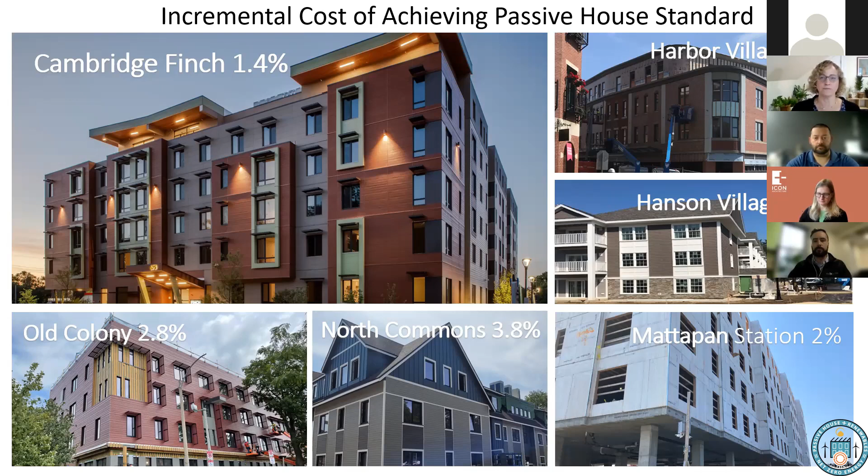Also, as part of our Passive House Design Challenge, part of the reason people might want to do Passive House is because it's not that much more expensive, but the flip side has to be true too. Are we really getting the lower energy use that everyone's promising with the Passive House standard? And so we've been taking a look at projects that have been built for a couple years now and trying to compare them to code-built and sometimes LEED projects as well.

Some of the logical places to look for that is in communities where there's energy disclosure ordinances. So Boston's one of those great examples. If you take a look at what was disclosed in 2019, sort for multifamily buildings, look for ones that were built after 2010, and cross-reference against which ones are passive house certified and which ones are LEED, you get this chart.

So the green on the left side is the only multifamily building that has been built for a while in Boston, the Distillery, which the picture is on the right. The energy use per square foot is very low there, 20.4. So it is giving the much lower energy use that we would expect from modeling. And when you compare that to the LEED and code buildings built in the same time frame with similar scale of projects, compared to the regular code ones, it's 62% less energy use per square foot, which is pretty dramatic.

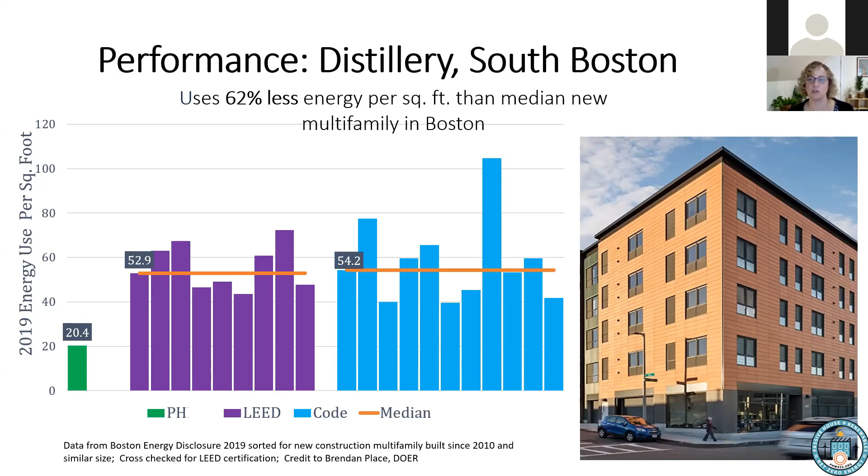And then we're finding pretty consistent information in Philadelphia also, which has that energy disclosure ordinance. So on the left are 3 passive house multifamily projects. All of these are just the affordable ones. And you see this, it's very interesting, right?

Because the green passive house ones, there's not much up and down. And that's not surprising, right? We have a lot of verification and blower door after blower door during the process of passive house. So I think it's much more likely that you're going to see what's designed actually built. And look at the variance in the code buildings, lots of variance. Some of these, I actually do know 1 or 2 of these were aiming for net zero, but no certification.

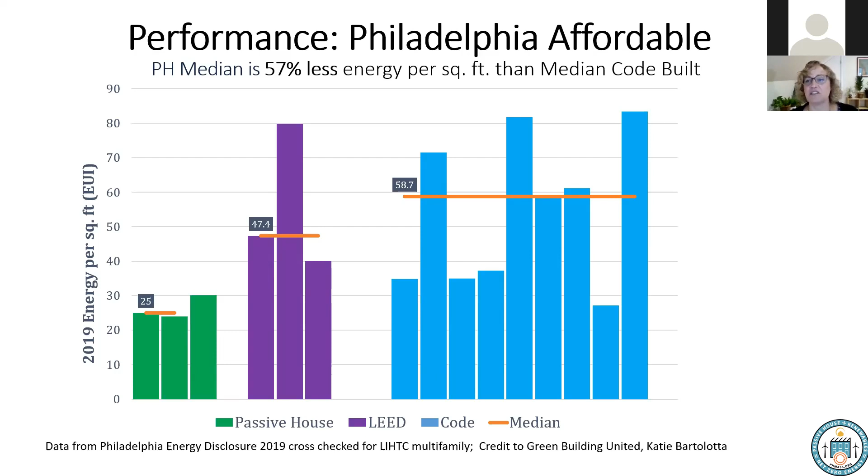And so that's what, you know, you can see some of these energy use per square foot are in the same range as a passive house, but it doesn't guarantee anything, which is really interesting. Then here's another example. This is basically Gilford Village. There were 2 stages of this. It's basically the same building built twice, 4 years apart, one with the LEED standard and one with passive house standard. And again, we're seeing around 61% less energy use in those buildings.

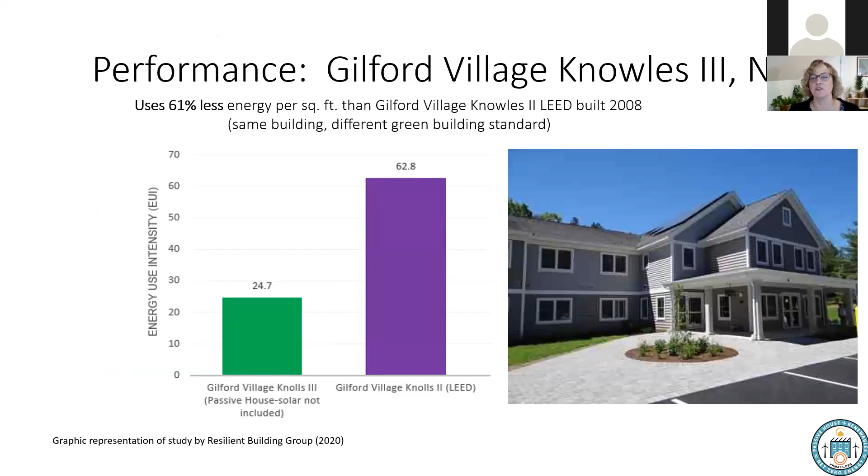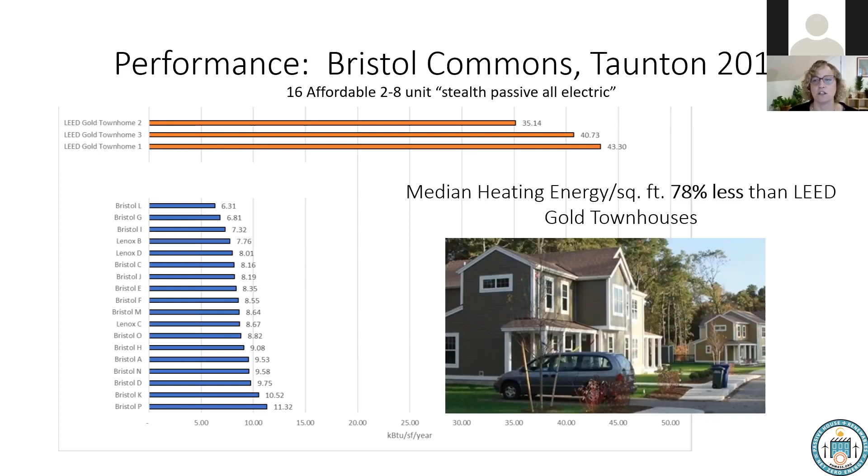And I think a lot of people know this one. This was sort of a stealth passive project. There were 16 townhouses between 2 and 8 units in Taunton. And this is just on the heating energy, so it's not exactly equivalent to the energy use per square foot. But again, we're seeing very, very dramatic decreases in energy use for very modest incremental costs. So that's really encouraging. So I'm going to hand it off to Michelle, who's going to talk a little bit more about the Gloucester project.

Awesome. Thanks, Beverly. So it's critical to design it right, which takes intention and a team. And then it's also critical to build it right, which takes communication and craft. And in the end, what I'm seeing real time when we have projects that have committed to doing commissioning and tracking, monitoring, and Tom's going to get into some of this, we've got to confirm that what we intended is actually functioning as intended. Next.

There we go. So I'm going to talk about Harbor Village today. The Distillery was our first passive house multifamily project, and it was in the city of Boston. This is our third. Harbor Village just was completed a couple of months ago, and whoo, passed the blower door test. And let me tell you, it was with a lot of pins and needles on the way. So I definitely have some lessons learned here. Also want to do a shout out here. Look at that fabulous lobster. This is our client in the North Shore who loves to put art on buildings, and it's just so iconic and fabulous. Next.

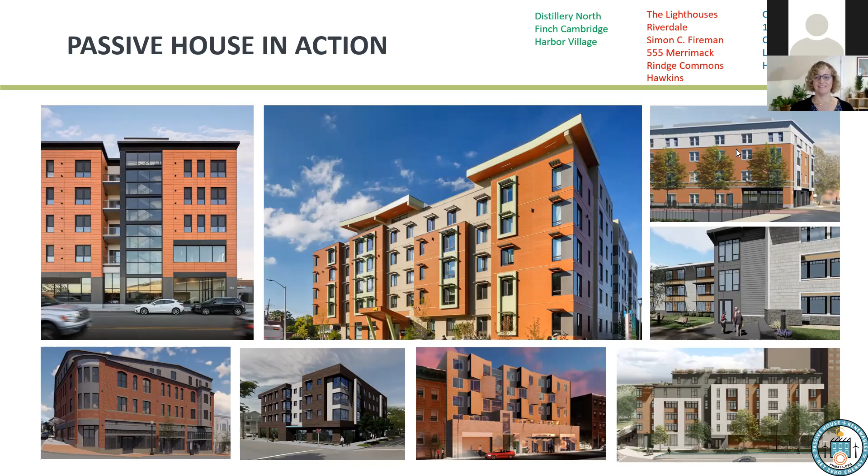Next. And there are a lot of really good reasons for that, which aren't just because passive house makes so much sense. They're actually because there's been a lot of great groundwork done. And so Beverly talked about Mass CEC, but those design incentives were critical to jumpstarting the broader market, and that's really what Mass CEC is focused on. Before that even happened, passive house was actually acknowledged in the building code as an alternative compliance path. I don't think that made much of a difference for the most part. But then those incentives came, and a handful of projects pursued them, and that ultimately opened the window and the door for the utilities to weave that concept into their incentives.

And we are, again, very lucky in Massachusetts to have the Mass Save incentives, which ultimately focused not just on affordable housing, but any multifamily housing at scale. And so we're starting to see some of the market pay attention. And I will say that a lot of that is not just because of the incentives, but because there is a lot of great community engagement and advocacy going on right now, really encouraging cities to evaluate more seriously what buildings are allowed to go forward and make sure that they're meeting the goals of the broader community. So I cannot say enough about that advocacy, because it's definitely the reason that we have market rate clients coming into the picture right now and trying to understand how to make use of these incentives. Next.

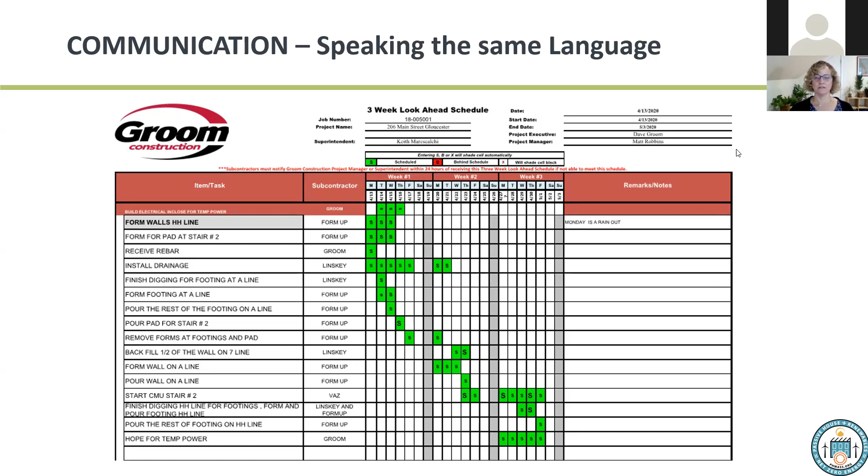And that's not all of this. Most of this doesn't come into play, right? But there's going to be something at the foundation, something at the podium, some exterior wall work. So we try to kind of flag those. And then as a team, just talk about the sequence of events and what we're thinking is going to happen. So here's an example.

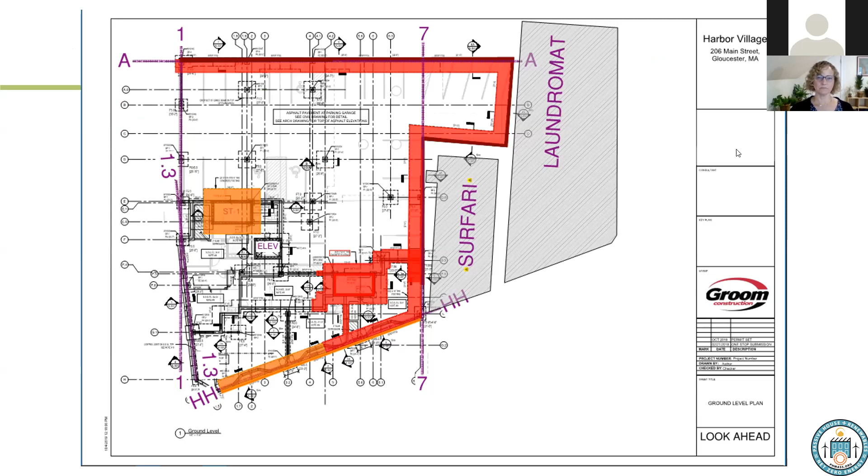This is from the contractor. You can see Groom there. They are articulating to us what's coming first in the next couple of weeks, which is in red, what's coming second. And some of these things, I should say, bump up against our passive house enclosure and important details.

So if the team can understand that, then we can say, oh, okay, in 3 weeks, we're going to be working on this scope right here. Let's dig into this particular sequence and what we, as the architect, thought was happening and the way we detailed it, and talk through it with the appropriate sub-consultants that are relevant for this particular sequence of work.

We don't need to bring everybody into the picture. We don't need to have a whole passive house kumbaya moment. We just really need to say, okay, you're going to be bringing the stair shaft out of the ground, and it matters to us. So let's look at our details. Let's articulate what we think is happening for second and third, and have the trades on the line to talk with us about that.

And we have found that within a half an hour, every couple weeks, just having a time available to have this conversation about the future sequence, not at the job meeting, but kind of separately as needed, we can get the right people on the line. We can very quickly evaluate whether what we envisioned is feasible or whether we might need to make some changes. And we certainly often do.

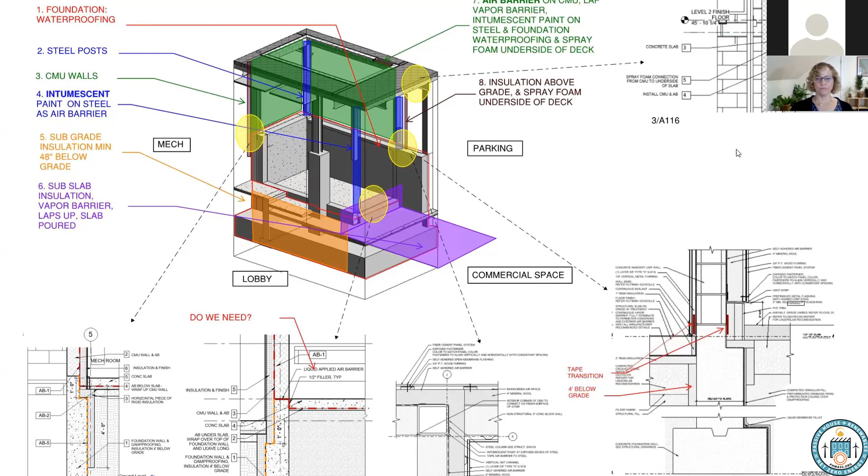We're architects, we're not builders. So we sometimes imagine the sequence in a way that actually isn't feasible or isn't the way it was bought out. And so having those conversations is just so efficient. And every trade just brings their expertise to the equation. And then we can walk away going, okay, this is what we're going to do. We all understand it and we can move on.

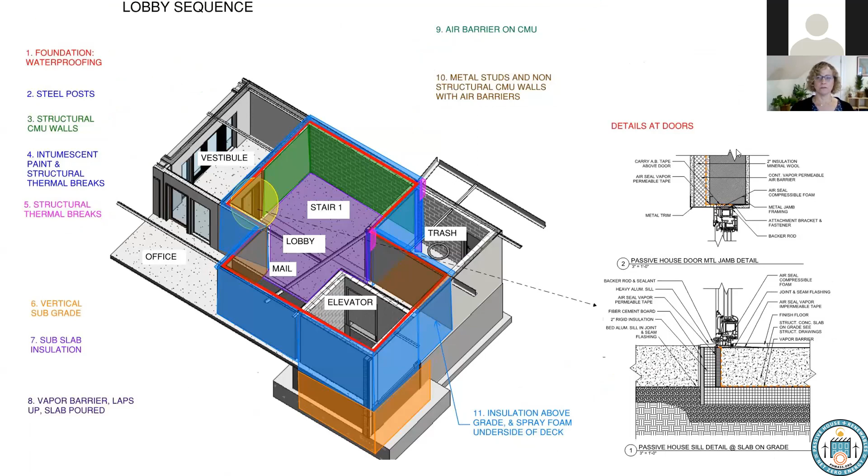So these are examples of how we have kind of talked through that process. It's an evolving conversation as we're learning to try to be more proactive before things happen, and just make sure that all the right people are at the table to have that conversation. And then, of course, we're referring to the details that we thought told us what we needed to do.

The last, but not at all least important piece is to really evaluate after the fact and to test and verify. And so that's during construction, and that's why that rater verifier, and we love the protocols around PHIUS certification. But also other tools that can be used during the process to evaluate where we have some weak points, like infrared camera work to see if we're missing insulation in certain places.

Clearly, the blower door testing is fundamental. It's pass fail, right? So we've got to get there. And I'm not going to go into the weeds because Tom is going to do that for us on how we struggled at Harbor Village. But on a smaller project, a small hole just makes that much more of a difference. So it really does get harder and harder. And it's important to understand how to chase the problems and find the solutions. And thank you, New Ecology, for helping us to do that. And then ultimately, we passed the test, woohoo!

But the systems, are they working right? Is everything functioning properly? The thermostats, the ERV, are the temps set right? All of that. Are tenants complaining? And that can go on for a while, and it really does take tinkering. And I couldn't emphasize enough that every project should have commissioning built in. And with that, I think I'll turn it over to Tom.

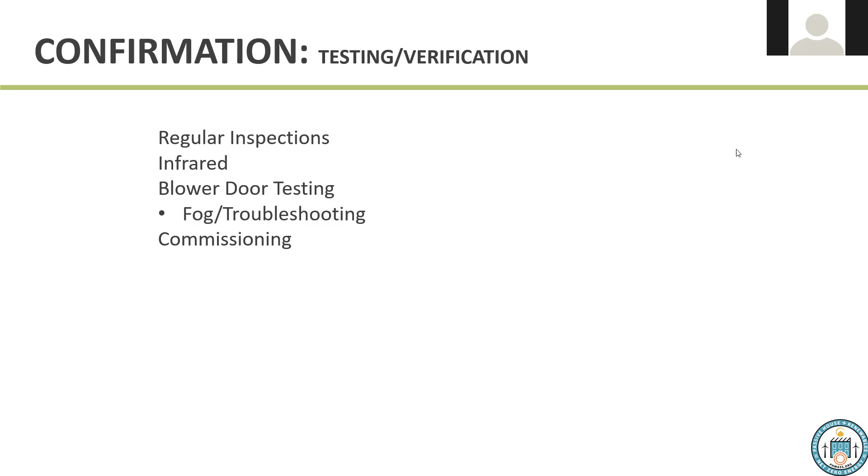So I'm going to quickly talk through the process of midpoint to final whole building blower door testing, and to set the context a little bit for folks who may be used to blower door testing of single family buildings. Even small multifamily buildings are complicated in terms of the different assemblies that come together, materials, and this one is no exception. So New Ecology was the passive house verifier on this project, and we view that role both in terms of confirming that what was designed got built and that the building can be certified, but also as one of the entities doing troubleshooting.

And I think a lot about the fact that there's only one full-scale model we ever get to build, and there are some things we find out when we build that full-scale model that we didn't really get in earlier models, even in 3D. Although a lot of really great effort has gone into understanding what's getting built before we get out there in the field.

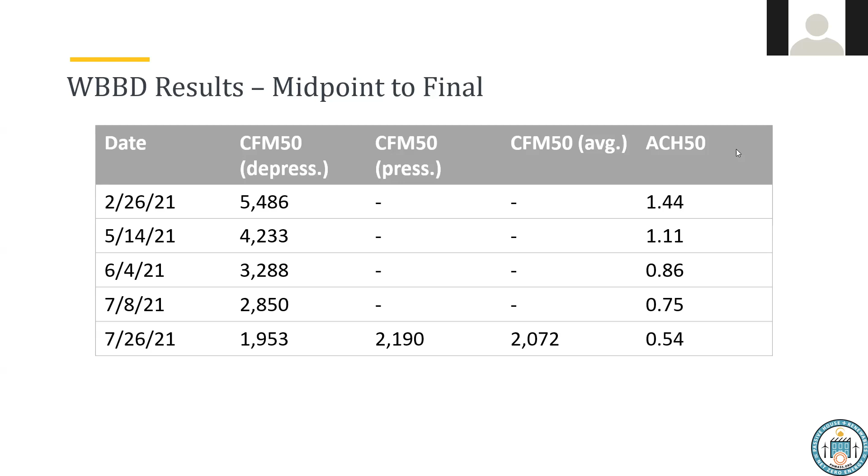And so this is a list of the midpoint to final whole building blower door test results. And what you'll see here is that we try to test early and often, even maybe before the whole exterior envelope really is ready to be tested for the air barrier, so that we get a sense of where our problem spots are and where we need to focus. And then as the envelope gets buttoned up, we continue to test and really narrow down that leakage to the very small leakage number that you get for a passing whole building blower door test for a passive house building.

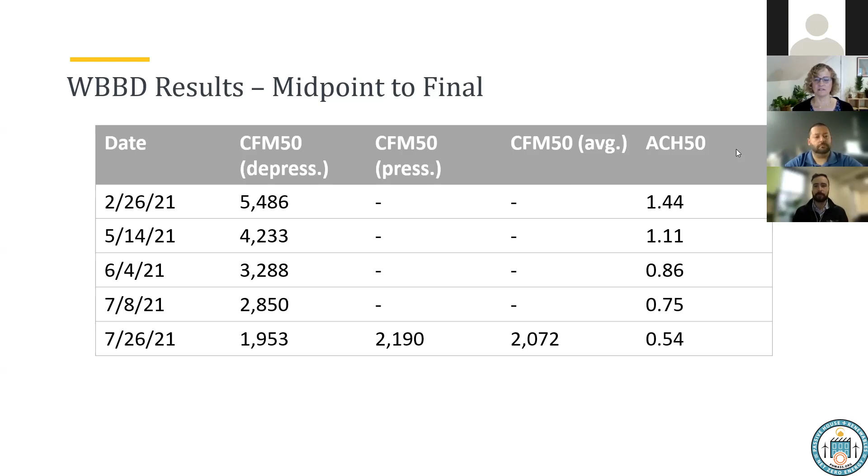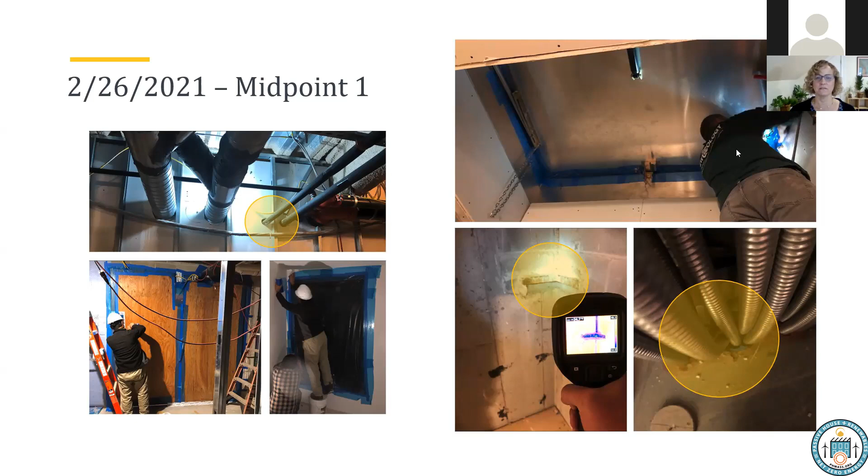So next slide. I want to show some images of what that testing looks like. So here's some photos from the first test. In the lower left, you see that we haven't got some doors in, we haven't got some windows in. So we're starting to put up temporary barriers so that we can get a sense of what the leakage is. And we find some of the big spots that aren't sealed yet, and we can target those. Things like where structure is coming together and hasn't been closed out yet, penetrations, mechanical penetrations, or potentially items we didn't plan for, let's say understanding how the gasketing actually works on a roof hatch. Next slide.

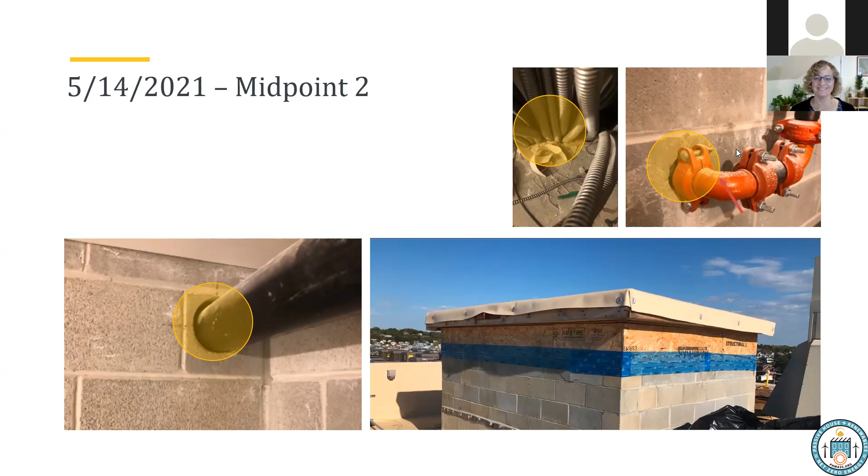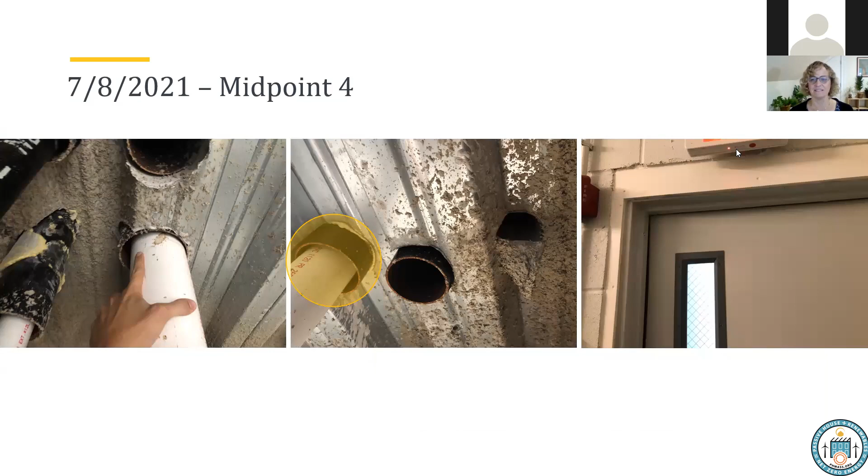And as that envelope starts to come together, we still have some locations in later midpoint tests that are still being finished, like the top of the elevator here on the lower right. Some mechanical penetrations. These are smaller than the earlier ones that we found, so we're continuing to narrow down those leakage locations. Next slide. And again, we're getting down to the really fine details towards the end. We start to push air in places we hadn't before in earlier tests, and to those smaller places where we can continue to seal and hit our final result.

And next slide. This is what things look like at the end. At the end, very few leakage locations remaining. Some that are really lessons learned for future projects. How do you do a lot of conduit through a slab that's also an air barrier, let's say? Really tricky.

This is a great find in the image on the left, a window that was delivered and installed with part of the gasket missing. So some of our minor remaining leakage is really just a last item to button up and make sure that we get that product repaired prior to closing out the project. So that's the process. Lots of testing early and often throughout, but really troubleshooting to make sure that we get there in the end. I think that's it for me.

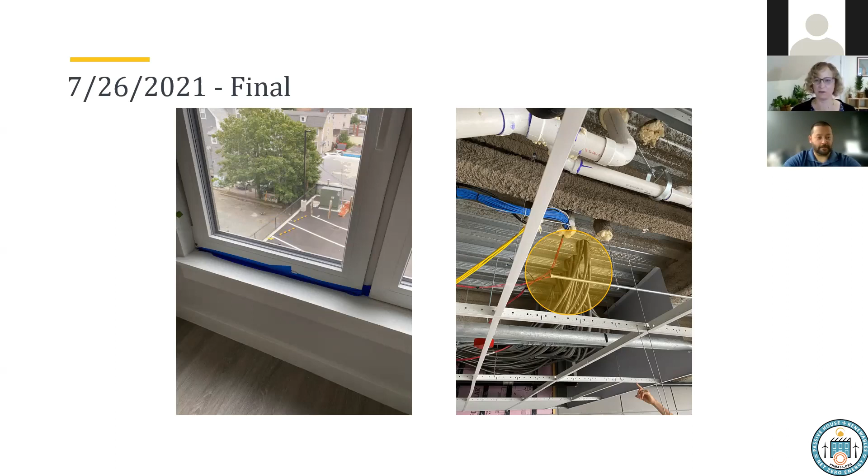So as Bev mentioned, this is North Commons at Village Hill. It's a new construction project in Northampton, Massachusetts. It's currently under construction and we're anticipating an end of 2021 completion. So we're getting close to wrapping up on this one. Next slide.

Great, thank you. So a quick overview of some facts about the building. Just over 61,000 square feet, including a conditioned attic space, which is one of the challenges we had on this job, and we'll talk a little later about why that was a challenge. We also had some architectural design restrictions based on the campus it's located on. It has a craftsman style, a lot of pitched roofs with different slopes coming together, which made for some complicated interstitial transitions. As Michelle pointed out, those transitions are really the challenging part, and we certainly had a lot of those on this project.

Mechanically, it's a VRF mechanical system with an ERV ventilation system. We'll talk a little bit about that. This is also a little unique in that for its domestic hot water, we had a propane-fired central hot water system, which is a unique challenge to this project based on some local requirements of the city. And we also have a 58 kW rooftop PV solar array on the building to help with some of our energy usage on the project.

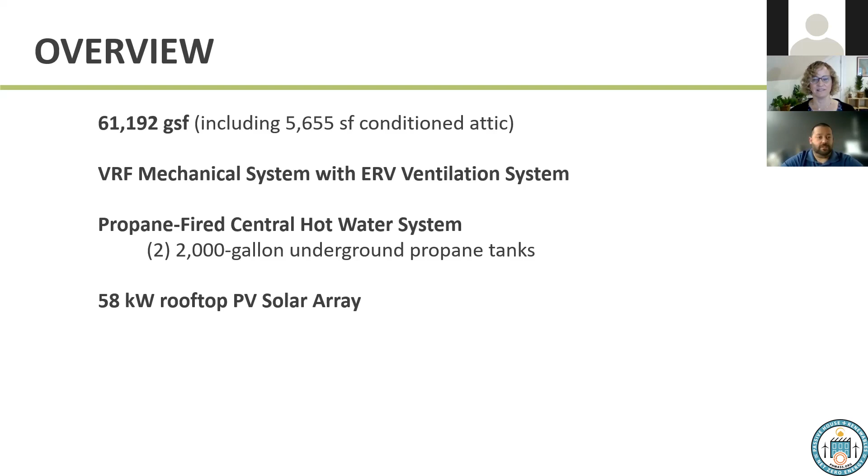As Michelle had mentioned, communication is also really important on this project. The general contractor had some experience with high performance buildings under different programs, but didn't have any passive house experience. So as part of our bidding process, TCB made a requirement of the general contractor for their site super, their project manager, and their project executive to attend phase 1 of the PHIUS certified builder training program, just so they were a little bit more familiar with the project.

Certainly it was a risk to us to go with a non-experienced passive house contractor, and we wanted to try to eliminate as much of that risk as we could. So in addition to the training we required the contractor to go through, our passive house consultant and rater also did two independent on-site trainings, one for the building envelope trades and one for the mechanical trades. It was to go over general requirements of passive house and some specific details of our project and critical areas they were worried about as potential downfalls to the project passing.

This is an overall sectional view of the project, showing some of the complex pieces of how the different roofs come together. It's all wood framed, 3-story building with a conditioned attic space. The attic space was used to run a lot of our ductwork, and all the control boxes for the VRF system are located up there. It's hard to see in this image, but there's a combination of spray foam insulation at the underside of the roof deck on the pitched roofs, and then at the flat roofs, a combination of both closed cell spray foam on the underside and polyiso on top of the roof.

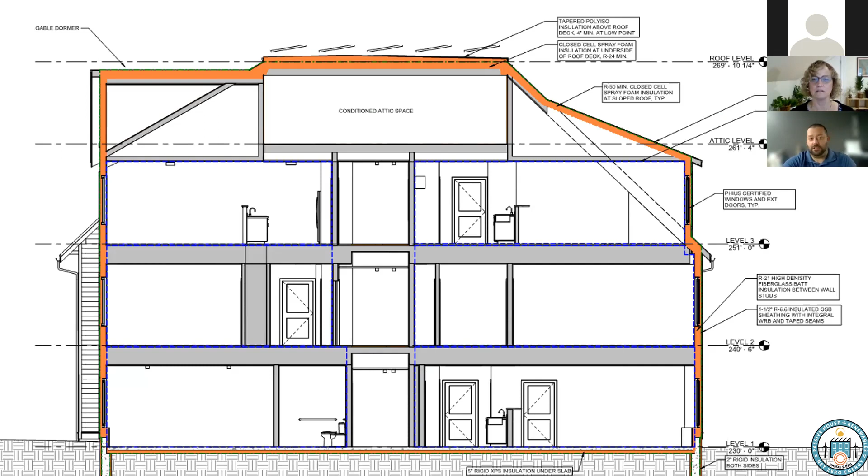Here you can see some of those transition details that were identified as critical by the passive house consultant and things we went over during that training with the subcontractors to get them up to speed. Things like overhangs, over entries, transitions from the pitched roof to the flat roof, really kind of maintaining continuity of both the air control layers and the thermal insulation layers throughout the building.

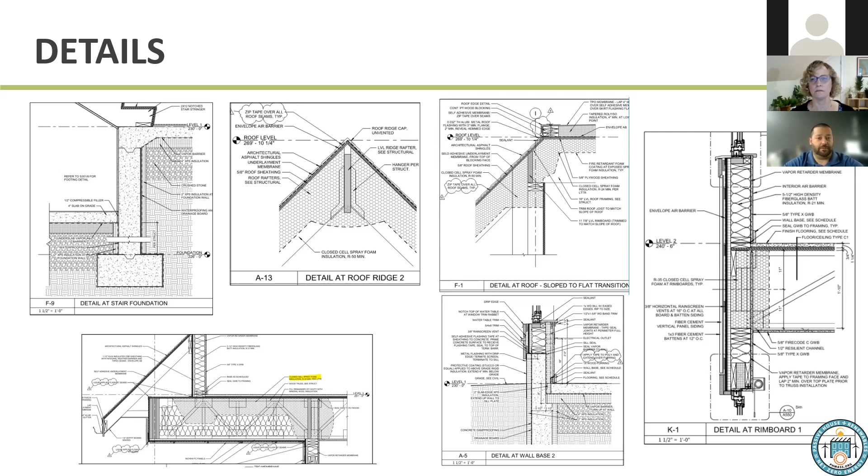Domestic hot water source is typically a hot topic related to full electric buildings and all their energy efficient processes that projects go through. At the time of design, and currently, the city of Northampton has a gas moratorium on new natural gas services. Despite it being available on the site to us, it wasn't available to us because of that moratorium.

So we did consider an all electric building. This building was designed about 4 years ago, so at that time it was hard to get an electric system that would meet the passive house requirements, be efficient, and make it viable for this project. We did look at it, and had our passive house consultant run the numbers. At the time, PHIUS was seeing electric being about 3 times more energy intensive than the propane system. We ran through those numbers, and in the end, if this same exact design had used electric hot water, we would have failed passive house requirements.

That was the tipping point for us. We really had no choice but to go with the propane system. So we have 2 underground storage tanks, 2,000 gallons each, located on the site that'll feed our central domestic hot water system.

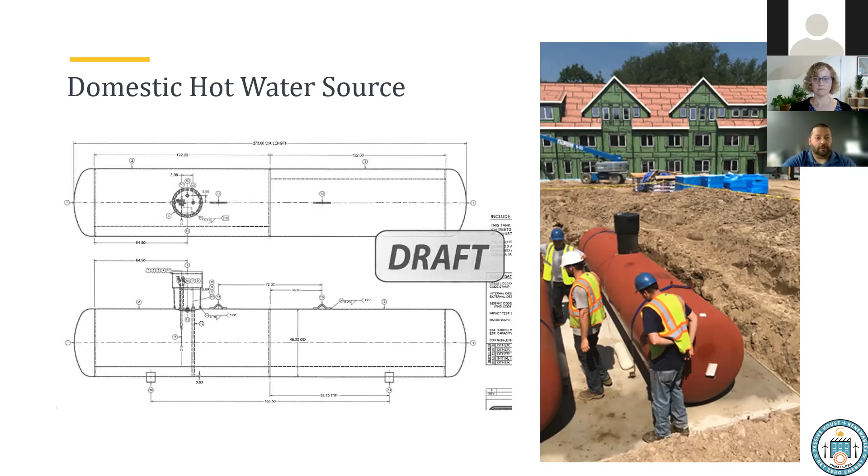But that becomes a really challenging spot to air seal when you have framing members at every 16 inches protruding past that wall envelope. So this became a challenge, and certainly contributed some to our incremental cost that Bev showed made this the highest project they've had so far. This alone, just for the framing to add this detail, was about a $30,000 premium to this project. Once you add in all the framing, the Simpson hangers, the tiebacks, sequencing, taping, and then coming back and framing it, there are just a lot of different challenges that add to the incremental cost of this kind of detail.

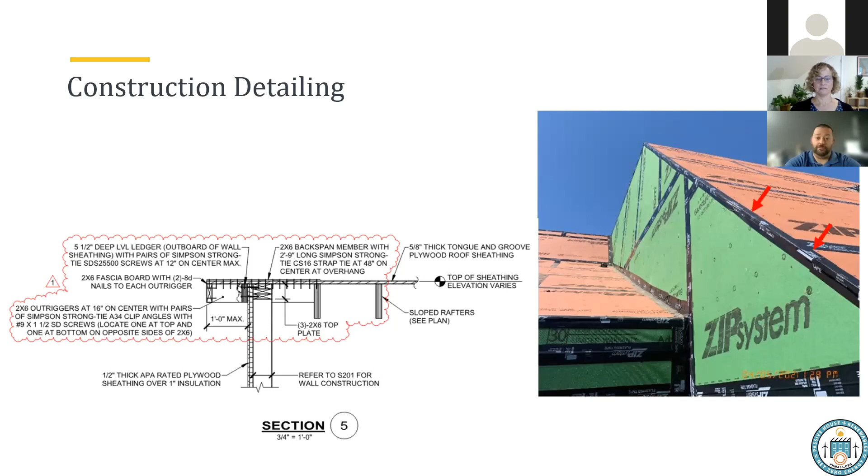As others have mentioned, testing and verification is a really critical component to ensure the built condition matches the design requirements. So not only did we go into some of the PHIUS rated inspections on site, we also had the contractor build an off-site mock-up in his shop, showing wall connections to slab connections, that roof connection we're really concerned about, as well as a mock-up of the typical window installation.

We had our passive house rater come in and do some testing on the envelope and the window, and it did lead to some changes in the design and detailing for constructability. It's a fine balance between keeping water out and keeping air out. You want weeps to let water out, but you don't want weeps to let air in. So it's a fine balance we went back and forth on multiple times, with multiple details, to get this right from both a constructability standpoint and something that would meet the passive house requirements.

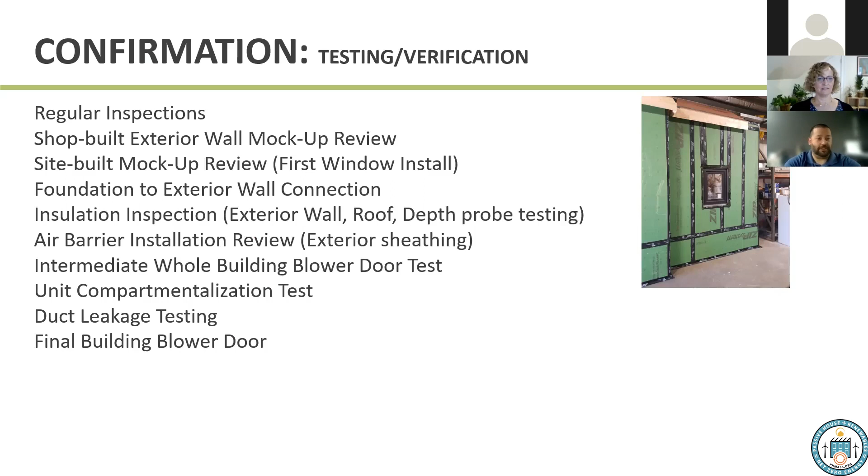So we went through the process, everyone signed off, and then we moved to the field. We took what we learned in that off-site mock-up and built an on-site mock-up in the actual building, actual window size, and tested that first window.

Everyone was up to speed, on board, and we had some really great testing numbers on this. You can see the target was 1.779, and ours came in averaging 0.821 — substantially better than required.

Great installation detail here — you can see some of the sealing behind the clip. These are Intus windows with a clip installation fastener. They get snapped into the frame of the window and then attached into the jamb framing. You can see some of the continuous caulking behind that clip and over the clip, which is really a requirement to help control any potential air leakage at the clip itself, which was good, and then some nice continuous caulking around the perimeter of the window.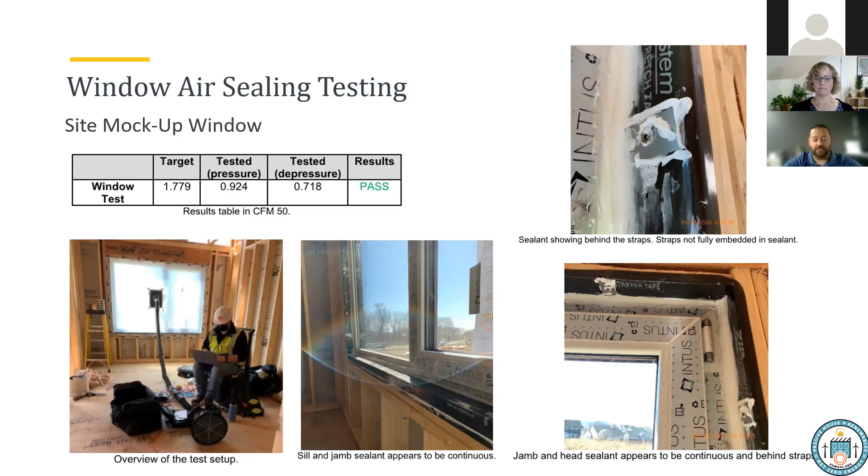Unfortunately, we all thought we were on the right track after that, and we came back as the passive house rater was doing some other testing. They said, we're on site, we'll test another window just to make sure we're still doing what we're supposed to be doing. And we found that the next window failed the test.

What we found was that at some point in the project, the subcontractor who was installing the windows and doing the framing switched their on-site foreman, and there was some information lost in translation about what we were really supposed to be doing to make sure those passive house details were met.

We ended up going through multiple buildings, having the contractor check every single one, and we found about 40 windows that had to be replaced. Luckily this was caught early enough where we could fix it — it wasn't even a scheduled test, we just happened to be there and figured we'd do some more testing while we were on site. So it's certainly good if you have the ability to test more often than not; we'd recommend it so you can avoid last-minute changes.

Obviously, if this unit had been drywalled and finished and we tested it at the end of the job, it would have been a lot more work to repair than when we were able to catch it early on.

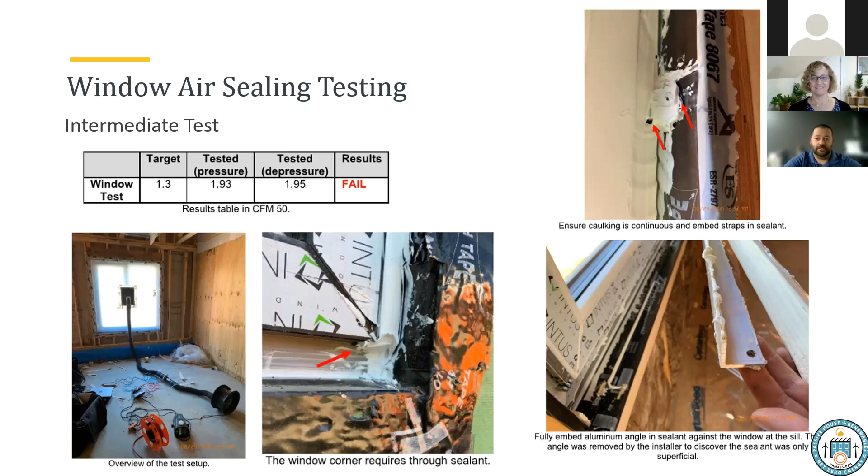So we also have closed cell spray foam insulation at the underside of our conditioned attic. There was some thickness verification testing, which was relatively straightforward. What I want to point out is since we had that conditioned attic as part of our envelope, the spray foam thickness required multiple lifts, which added to cost. It also required an intumescent coating since it was exposed to the envelope of the building, which added, just for the coating alone, another $25,000 to the project.

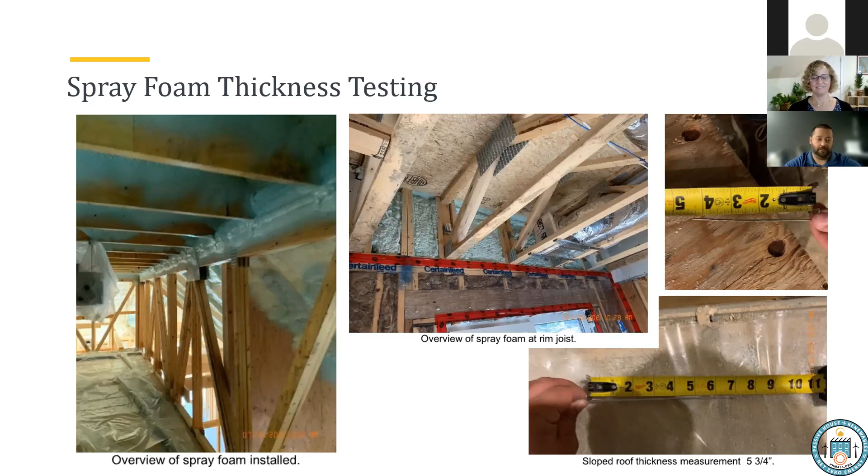So when you're thinking about passive house design, try to keep in mind any of those critical details that may be atypical that might cost you money later on. Even though we had a fully sprinklered system in the attic, we still needed to put the intumescent coating on the spray foam, so that was another contributor to our high incremental cost.

So we're still under construction, but we've started some of our testing, unit compartmentalization testing, which we're passing really well. We've done the third floor units, which are the smallest units, so the least tolerance for leakage based on the square footage that Tom was talking about. For our contractors, being their first Passive House job, they're passing on all counts other than the window test we talked about. So we're really happy so far, and optimistic that'll continue through the rest of the unit tests.

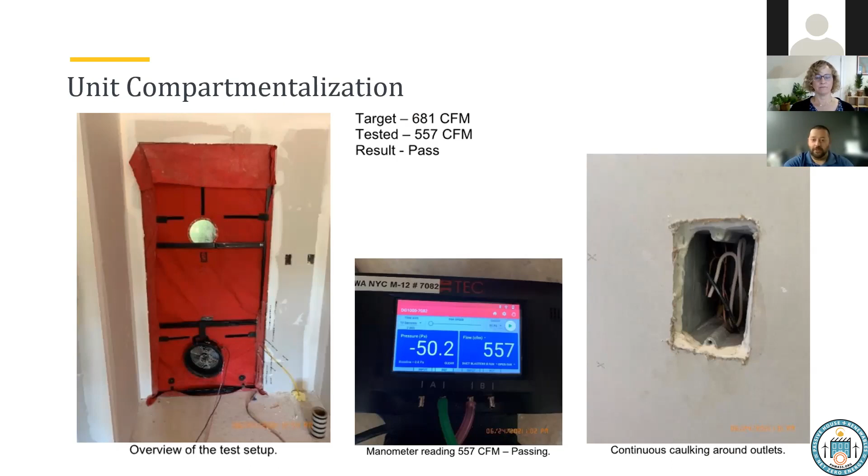We also had numerous electrical penetrations coming into the mechanical room that all had to be capped and sealed, which was a little time consuming for the contractor to do. Really the most challenging sealing was that we didn't have all of the plumbing fixtures hooked up yet.

So we had to seal the sanitary sewer system in the road to alleviate any leakage through that system that wouldn't be there when the system was fully intact. That required shutting down the road, opening up the manhole, going in there, sealing it at the manhole connection, which required this test to be on the weekend when no one was there. So there were some extra costs the owner had to incur to get our team out there on the weekend to do this test, which wasn't really considered originally.

All in all, the blower door test went really well so far. You can see we're at 0.31 ACH50, so we're well beyond the Passive House requirements right now. We're getting close to the end of the project, so we're gearing up for our next round of whole building blower door testing, and we're cautiously optimistic the results will be in line based on everything we've seen so far. So that's a quick overview. Hopefully that was helpful, everyone. Ben, we'll turn it back to you.